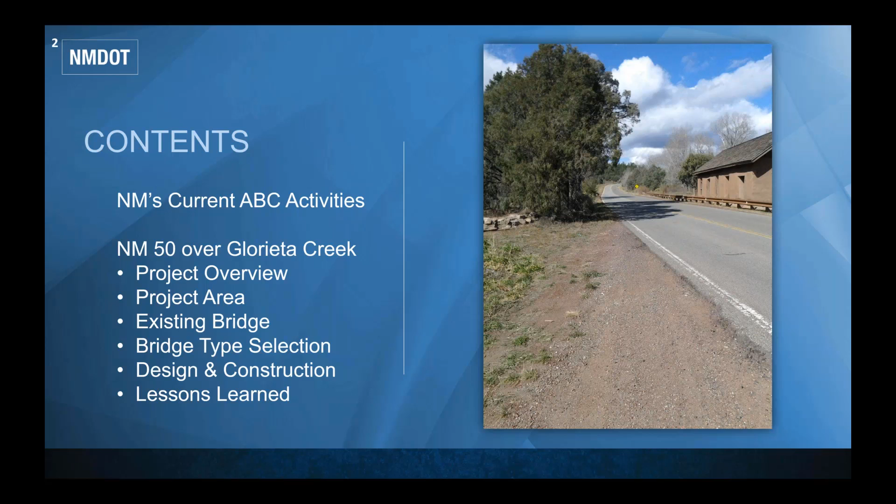In New Mexico, we've been working to advance the utilization of accelerated bridge construction. Currently, the I-25 Romeroville interchange replacement is in design. The interchange is the primary access to a truck stop to the west, and then frontage roads that access several residences in the area. And then to the east is the junction to US 84, which ties into Interstate 40.

It's a lot of commercial truck traffic. It's a very heavily used interchange. A long construction duration to replace the bridge would be very problematic and expensive. So the bridge type evaluation focused on ABC and was completed by our internal bridge staff. The project is now moving forward to phase 2 design.

Also currently moving to construction in the state is a steel bridge, New Mexico 566 over the BNSF Railroad near Gallup, New Mexico. This is a very busy rail line for BNSF. It's the primary route from the ports in California to the east. There's not a lot of time between trains.

So the design and construction approach is to erect the steel girders in pairs with all of the permanent bracing installed. This will provide stability during erection, minimizing the temporary erection bracing, and then also reduce the number of girder sets over the railroad by up to 50%.

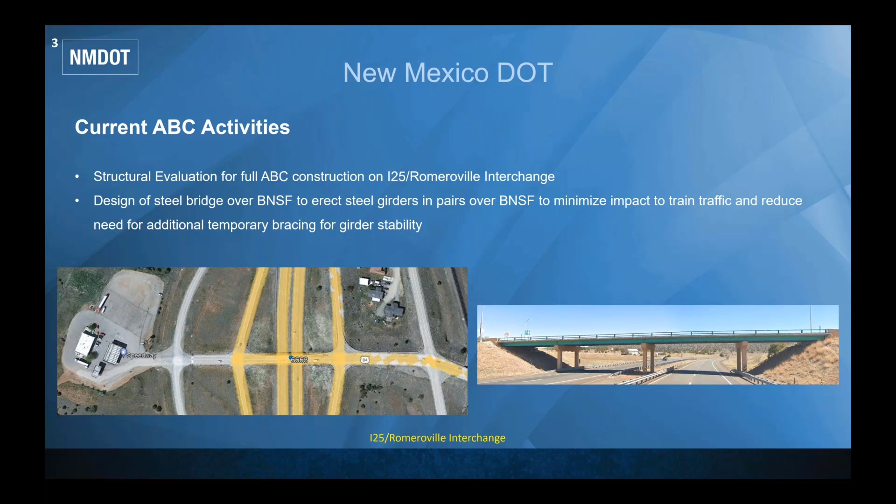In New Mexico, over the years, we have been using prefabricated bridge elements for bridge construction, which is a primary and integral part for ABC. We've completed several projects recently that were originally designed to be constructed as an accelerated process. But when they got to construction, the contractor negotiated and basically changed the approach to be more of a traditional construction process.

The two projects that I'd like to focus on are the Guadalupe Street Bridge deck replacement in Santa Fe, New Mexico, which is shown in the upper right photo. It was a precast deck panel bridge deck replacement on steel girders. Everything went to plan until construction, and then it just extended and became more traditional.

And then the other project was the rehabilitation of the Interstate 40 Endee interchange at the New Mexico-Texas state line. It also used precast deck panels and was our first UHPC joint connection project. And again, once it hit construction, it became more of a traditional approach.

So based on those two projects, we felt that some internal education was needed for the other sections and our construction folks to make ABC more successful in New Mexico. We reached out to FHWA and applied for STIC funding, and last fall we held an ABC workshop in Santa Fe.

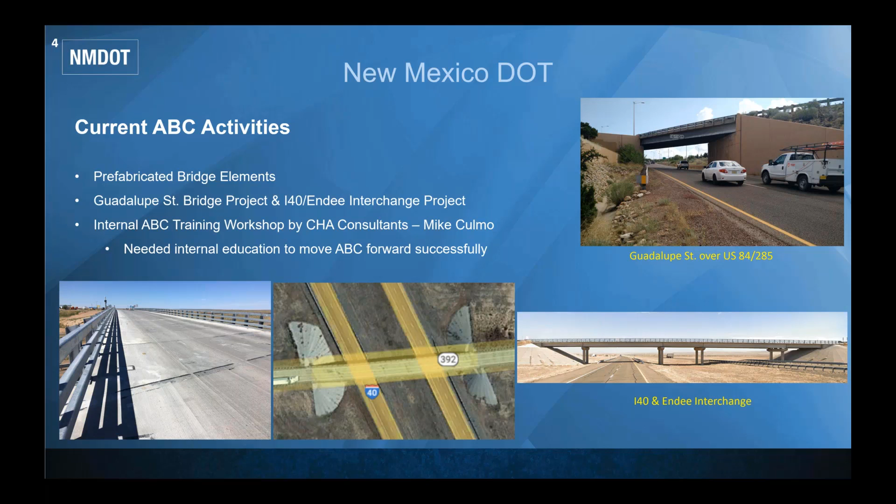So the New Mexico 50 over Glorieta Creek bridge replacement, and that's the bridge shown in the right photo, was our most recent project that required ABC, and it was very successful. Later on in the presentation, Kim Coleman will give a detailed overview of the project, the success of the project, and lessons learned that will be key to NMDOT advancing ABC on future projects.

With the recent federal infrastructure funding that has been given to the states and the ability to use it on local and off-system bridges, we're looking at ways to help the local governments in our state. We currently have a bridge replacement in design that has a good superstructure with good girders, but the substructure is poor.

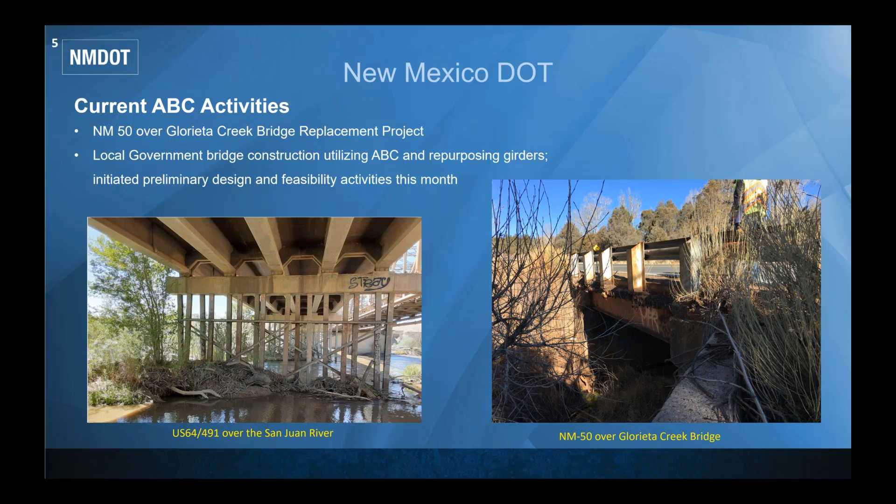We're doing some preliminary design and feasibility analysis to repurpose the girders to help replace poor bridges, primarily in McKinley County, which is to the south of the project site and is located on and near the Navajo Reservation. It's anticipated in our preliminary analysis that an ABC approach will be the most cost-effective method for replacing those structures, since most of them are rural and there's no detour around them.

New Mexico's goal is to advance ABC on our bridge replacement projects. The benefits to reduce construction time, impact to users, and worker safety are very important to us. Current inflation has had a huge impact on our overall construction costs, and traffic control is a large portion of those costs.

Last week, I was at the WASHTO conference as a presenter, but I also sat in on a presentation by Graham Bettis with TxDOT, and he discussed how prefabricated bridge elements are primary components of ABC, and that bridge slides and moves with SPMTs aren't the only ABC methods. And I completely agree with that.

And New Mexico has been using prefabricated elements for a long time. What we need to do is focus more on the construction process, sequencing, and then the contract language to advance ABC. Graham also discussed how they have modified their design procedures for bridges to advance ABC.

In New Mexico, we currently use the Wisconsin DOT flowchart to screen ABC for our projects, but somehow in the end, it usually gets flushed out and ABC isn't the primary method for construction. I would like to modify our design procedures to be similar to what maybe TxDOT has done to advance and make ABC more viable in the screening process, because I think the benefits are good for everyone involved.

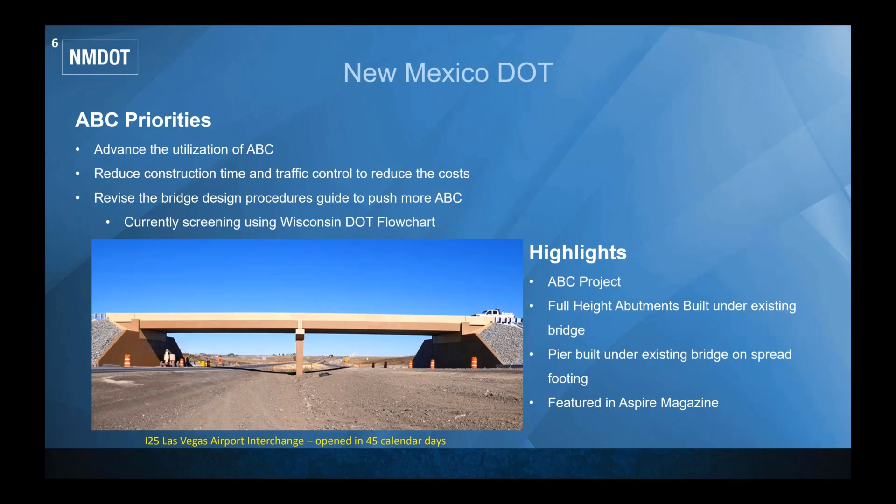Just to highlight on this slide, the bridge in the photo is the I-25 Las Vegas Airport interchange bridge replacement that was done several years ago. It was a 45-day bridge replacement project, and the highlights of that project were it was an ABC project. Full height abutments were built under the existing structure. The pier was constructed under the existing bridge on a spread footing, and then it was also featured in Aspire magazine as a very successful ABC project for our state.

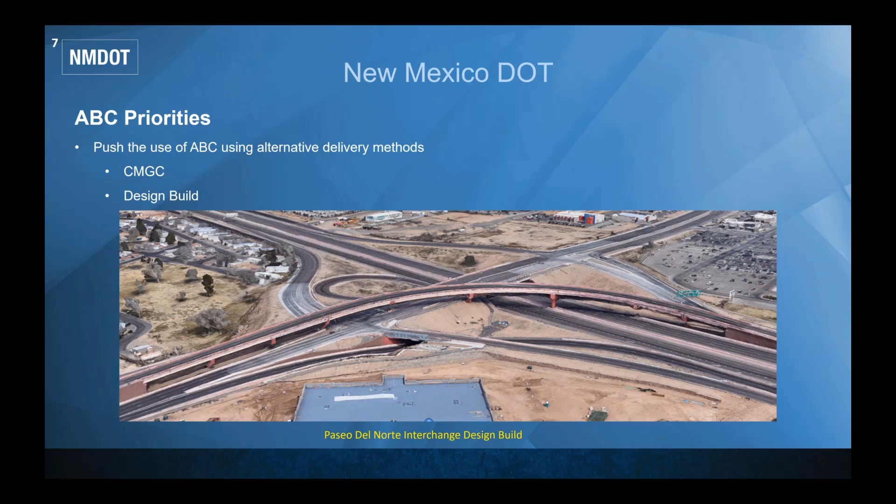Recently passed legislation in New Mexico, I believe, will help advance ABC going forward. Our legislature recently passed CMGC, and we had a cap on design build projects, a minimum cap. I think these alternative delivery methods will help advance future use of ABC in our state on projects. Our most recent design build project was the Paseo del Norte interchange shown in the photo. It is an example of a project in New Mexico that would have benefited from more ABC techniques to complete the construction faster and reduce the user impacts and detours and delays with construction.

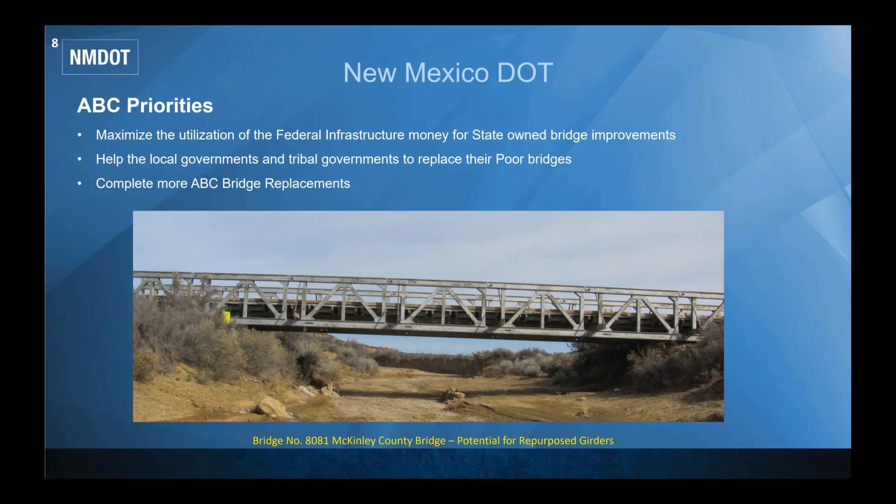Going forward, our priorities will be to maximize the utilization of the federal formula bridge funding to address our off-system state-owned bridges that haven't had the attention they've needed over the years due to lack of funding, and also to help the local and tribal governments rehabilitate and replace their poor bridges. They have also been impacted and limited on what they could do by funding and engineering capabilities. So we want to help address their bridges since it's a significant need for our state. And then finally, as discussed previously, our goal is to advance ABC for future bridge replacements and hopefully resulting in more successful projects like the New Mexico 50 project.

And just to note, as many of you may have seen in the news recently, our state has been experiencing unprecedented wildfires due to drought conditions. Shown is an approximate outline of the current burn scar, and you can see that the project location is very close. President Biden actually just visited New Mexico and toured the area and flew it to assess the damage and has agreed to help fund the wildfire relief efforts here in New Mexico.

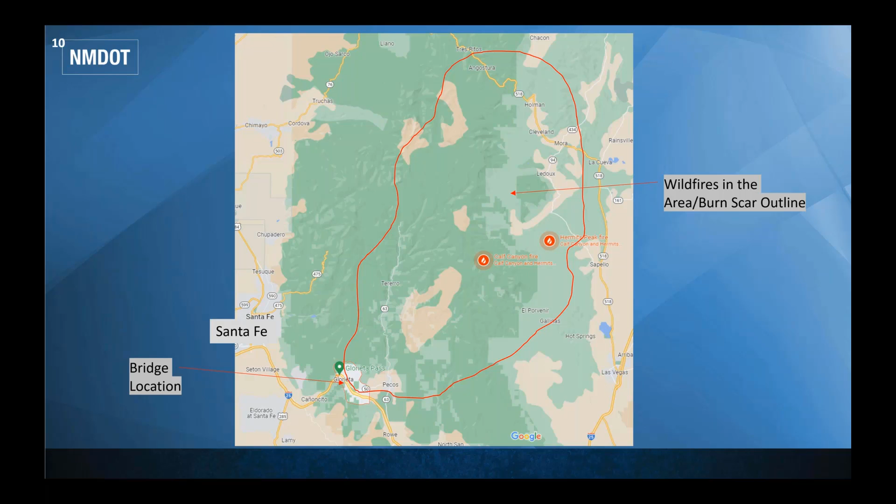Now that I have given a brief overview of ABC in New Mexico, I'm going to pass it off to Kim Coleman, the bridge engineer manager and designer of the New Mexico 50 bridge project, and she will provide a detailed overview. Thanks, Shane, for that excellent introduction to the project area. Now let's drill down a little bit into the details. So the New Mexico 50 Glorieta Creek project was a traditional design bid build project at a total cost of $2.1 million. The contractor was limited to a 7-week road closure, and they made it. The bridge was open to traffic 1 day early, and the project was completed with no claims. So this was a very successful project for us.

NMDOT is the owner of the road and bridge, but I believe our right-of-way is actually an easement through National Park Service land. The project was designed entirely in-house here at NMDOT with bridge, roadway, right-of-way, drainage, geotech, traffic, environmental, and cultural resources all happening in-house. AUI was the sole bidder on this bridge, and they were awarded the project. All the pieces were cast at Castillo Precast, about 25 miles south of Albuquerque in Belen, New Mexico. And UHPC was from Lafarge, and it was their Ductal product.

Our spec did require for this project that the Lafarge representative be on site during the UHPC pours because we wanted to make sure we had their advice as things were going along.

The project had a lot of stakeholders. As I mentioned, the National Park Service owns the land around the project. We also had the New Mexico Department of Game and Fish involved, Santa Fe County, the Santa Fe Regional Emergency Communications Center, including nearby fire departments, and also the Santa Fe Public Schools Transportation Department.

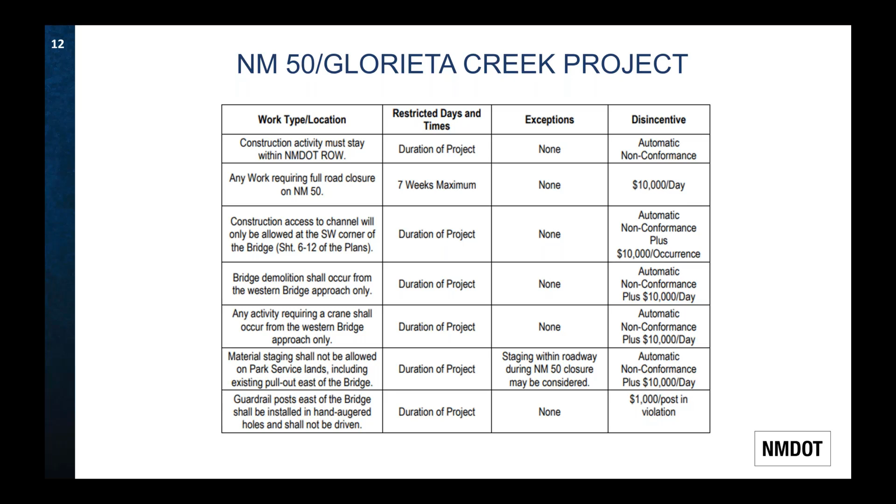Here's a zoomed in map of the area. As you can see here, Santa Fe is just to the south. This is actually northbound, the direction I'm going here, even though the interstate takes a jog. The project site is just over 1 mile east of the I-25 Glorieta interchange on New Mexico 50 at milepost 1.15. Note here we have Pecos to the right on New Mexico 50 and Rowe down I-25.

This project area, as you can see from the purple in the middle of the map, is owned by the National Park Service and is within the Pecos National Historical Park Pigeon's Ranch unit within the Glorieta Pass Battlefield National Historic Landmark. And this was the main battlefield of the Battle of Glorieta Pass during the Civil War. So you can imagine we had some constraints in this construction.

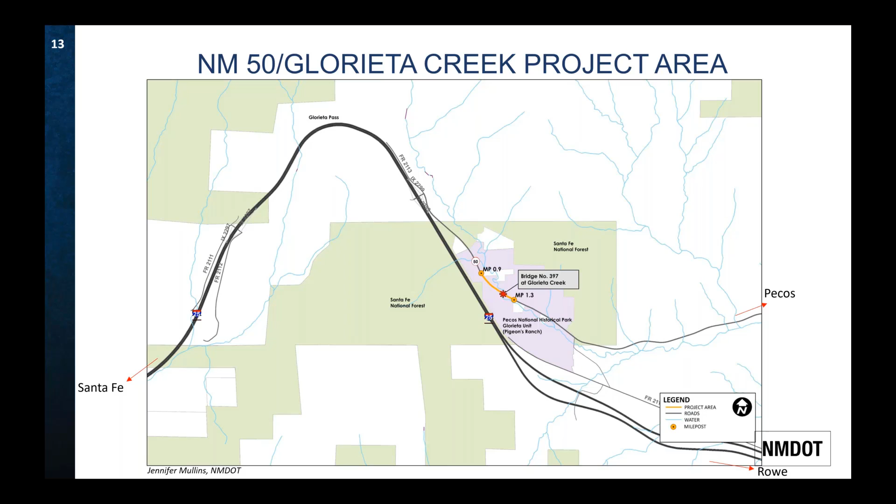Here's a zoomed in map. The detour route for this bridge was 18 miles long. As I mentioned before, we have Pecos here and Rowe here. So if you live just east of the bridge and you want to go to Santa Fe, you have to travel east on Highway 50 to Pecos, south on Highway 63, and then back northbound on I-25 just to get 1 mile towards the interstate.

Quite a few people live on New Mexico 50 just east of the bridge and commute to Santa Fe regularly for work and shopping. School buses use the route for getting kids to school. So we knew if we had to close it to replace the bridge, we would have to get it back open quickly. And we did consider phasing, by the way, and I'll talk some more about that as we go, but it wasn't really a viable option in the narrow right-of-way.

So with the bridge out for 7 weeks, we had two main concerns: school buses and emergency responders. We anticipated that the summer closure might extend into the school year, so we were in communication with the school transit department so they could plan their bus routes accordingly. And we were also concerned that emergency response times would be too long due to the 18-mile detour.

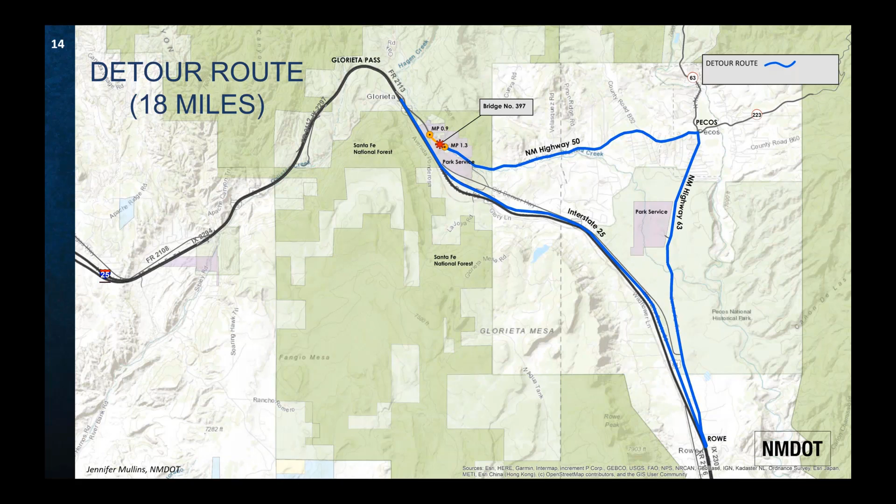So with cooperation and coordination with the National Park Service, we were able to establish an emergency detour route, which is shown here. This is the bridge right here. And as you can see, the emergency route comes off New Mexico 50 on a local road and connects to the old Denver Highway, which actually has an old on-ramp to the interstate.

In the end, it was never used, but it's a great example of pre-construction coordination and included a formal legal agreement between the NMDOT, the National Park Service, Santa Fe County, and the Santa Fe Regional Emergency Communications Center.

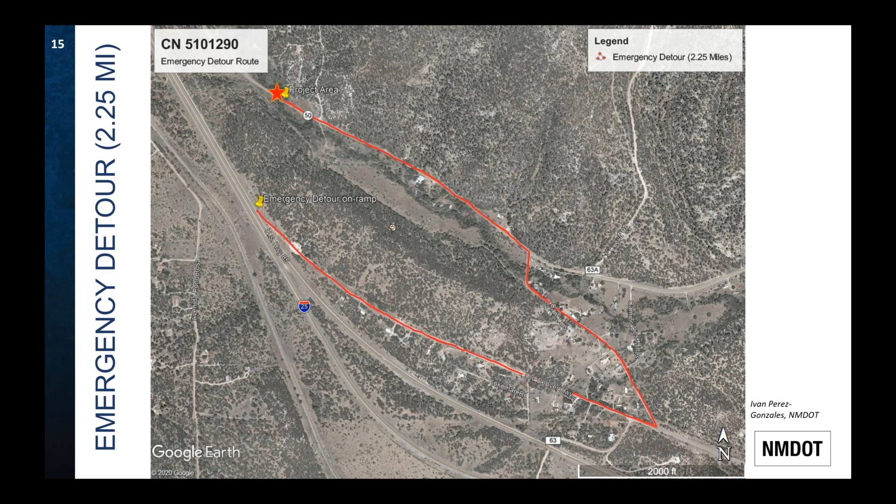In our coordination with the National Park Service, we learned that minimizing ground disturbance was going to be very important in this area. So Bridge 397 itself is not eligible for listing as a historic property on the National Register of Historic Places, but we do have other historic structures in close proximity.

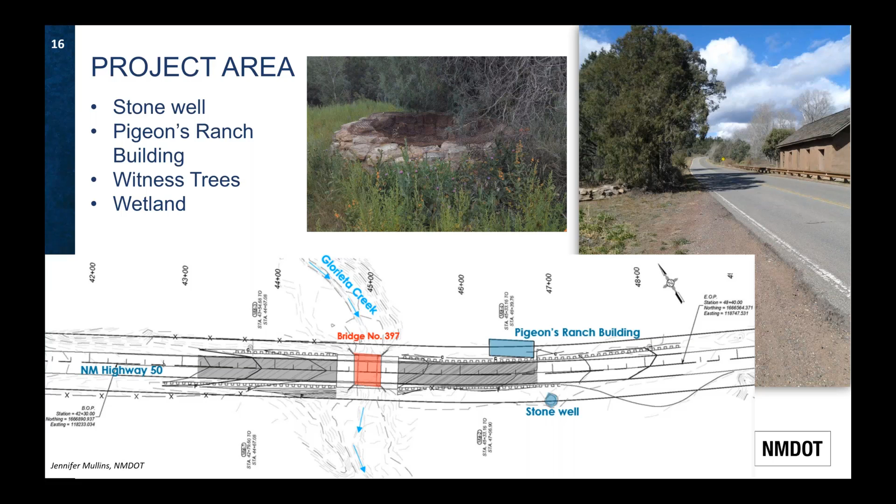Since this was an ABC project, our Environmental Bureau coordinated a preliminary survey of the area prior to starting of construction, and that way, hopefully we could find and mitigate any historic sites before we got started with the road closure. Here's a couple more pictures of the existing site. This is Glorieta Creek looking upstream underneath the bridge, and then here's a picture of the existing bridge from above. You can barely see that it's a bridge, especially since we used W rail back in the original construction as the bridge rail.

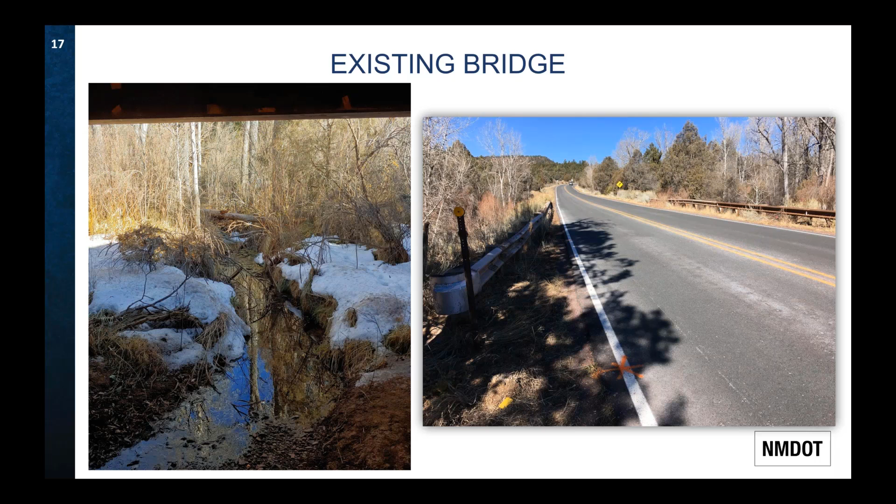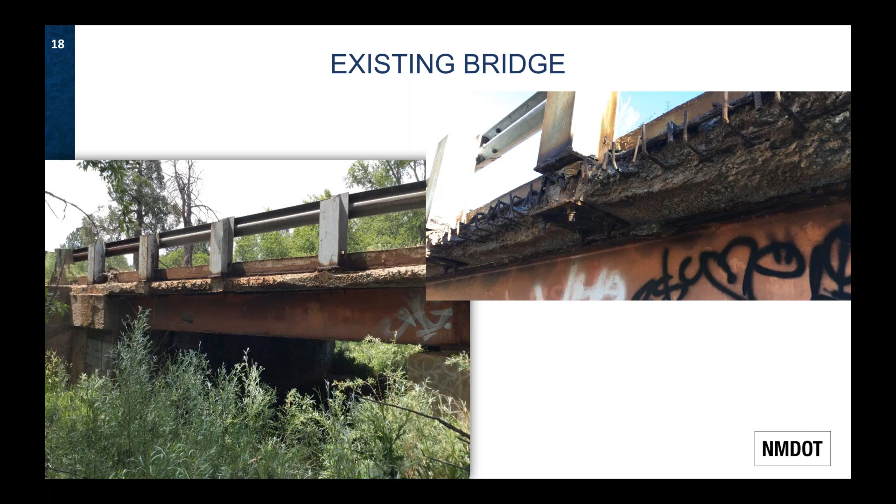So here's another picture of the existing bridge. Note the non-standard railing here, posts and a W rail, and also note the heavy deterioration of the deck edge. Because of the condition of this deck edge and the railing connections to the deck, one of the first steps we took during project planning was to get the crash records, especially any kind of crashes caused by lane departure, because we wanted to make sure as we were planning that we weren't going to have accidents before we had a chance to replace it. And then also here, note the wealth of greenery, which is pretty unusual for New Mexico. So that may be one of the reasons the Park Service wants us to be real careful with it.

Again, a profile of the original bridge in the upper right. This was a 22-foot span cast in place, mild reinforced concrete T-beam bridge built in 1923. And in all of our bridge records, we could only locate one sheet of plans for this bridge. Here at the bottom of the slide, you can see a typical section taken from the standard drawing, which was the only sheet we had, showing the original superstructure typical section. The rest of the standard shows beam sizes and rebar tables for a 23-foot wide superstructure of 6 different possible span lengths. We didn't have any other drawings, including substructure, nothing.

So you're hearing me say that this is a concrete T-beam bridge, and you're looking up here and seeing a steel girder and saying to me, what on earth is going on? Well, somewhere between 1977 and 1979, the superstructure was widened from 23 feet to 33.5 feet. First, they widened the substructure with reinforced concrete abutment walls and wing walls, and the superstructure was widened with one steel girder on each edge, but we do not have any drawings for this. And we believe that the work was done by our in-house maintenance forces.

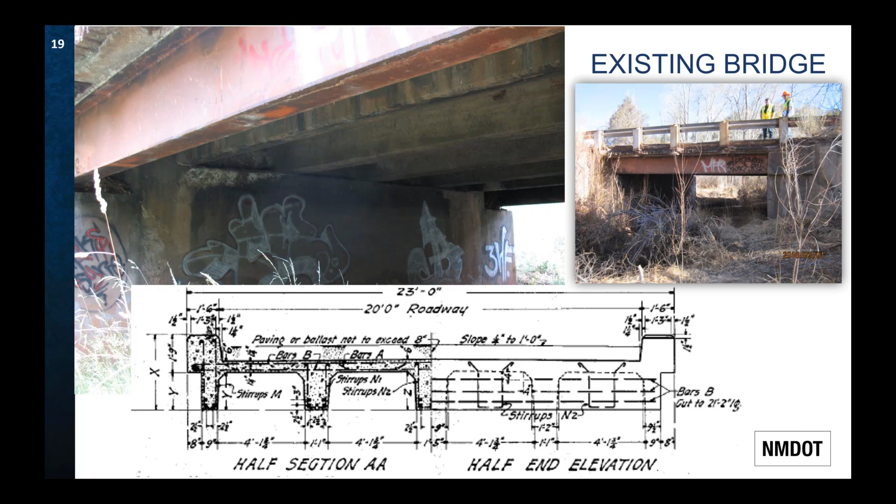So because of the existing superstructure width and the load capacity, I'm going to talk now about why phased construction was probably not the way we could go. We did consider repairing the bridge. And the reason that was attractive to us is first the 18-mile detour, the fact that we had a lot of environmental and historic considerations on site, and also we only had 60 feet in width. We did, however, consider that we had to replace it for the below reasons. 33.5 feet is the total width of the bridge, and the rail is in terrible condition. So we didn't want to be pushing trucks closer to the rail. The load rating was not very good, we had it at 11.3 inventory and 18.8 operating.

And we also chose to do non-destructive testing because we wanted to know for sure what kind of bridge we had out here. We ended up doing GPR, sonic, ultrasonic impact echo, velocity testing, half cell testing, chloride measurements, and carbonation measurements. So we wanted to know everything since we didn't have any plans to speak of. What we found is we actually had a couple of locations on the beams that were 600 PSI. This is supposed to be 2000 PSI concrete, but it wasn't. And then we do have locations in those beams with active corrosion. So in the end, we determined that replacement really was the only option.

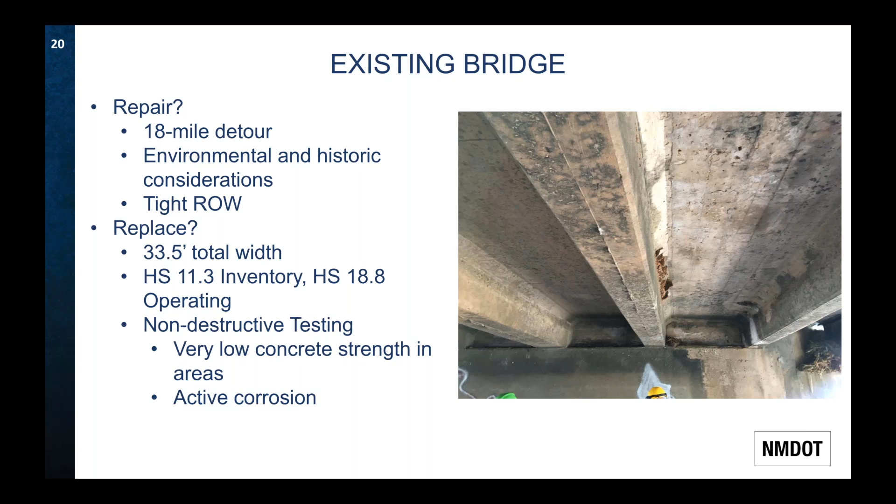To make our ABC assessment, we used the ABC decision making matrix from Wisconsin DOT. This gave us a score of 28, which indicates prefabricated bridge elements and systems. As we've already discussed, the detour is long and it affects the emergency vehicles and school buses, and our right-of-way is very tight, so we couldn't safely phase construction.

We also have significant environmental and cultural restrictions, and there is very limited space for construction staging near the bridge. We did have to use the roadway during closure for staging and materials, not much shoulder off this bridge. So having an accelerated schedule helped to minimize the amount of time material and machinery had to be stored on site. And finally, the National Park Service had many concerns about construction disruptions to the wildlife, the foliage, and the historic look and feel of the site.

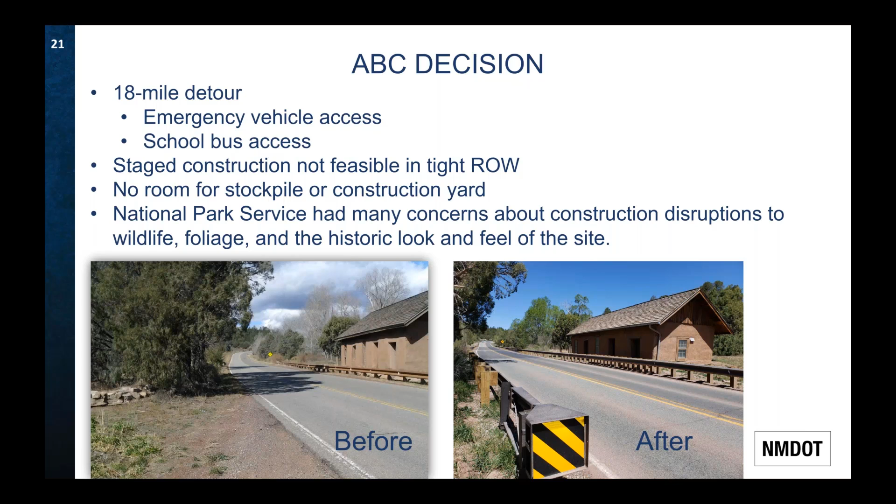Here at the bottom of the slide, you can see a before and after photo. It's hard to see here, but the bridge is right here in the before and right here in the after. I think we did succeed at preserving the historic look and feel of the site. And I do also want to mention the Natina coating. We used a brown coating on the galvanized bridge rail to make it look brown and blend into the weathering steel W rail that Roadway chose to use.

Okay, now for bridge type selection, we compared a precast concrete slab bridge and a prefabricated modular steel bridge. From the National Park Service and the Environmental Bureau, we had to consider several things. First, they wanted us to minimize disturbance in the creek and the surrounding area. So our design and specs worked to minimize excavation, scaffolding, equipment, and demolition and construction debris. And we even kept construction foot traffic within our 60-foot easement. We also needed to minimize vibration, so that drove us to use drilled shafts rather than piles.

The structure needed to have an open bottom, and this came from the New Mexico Department of Game and Fish. They asked that we maintain the ability for all animals, fish, and invertebrates to travel up or downstream uninhibited. So a culvert was out. We couldn't have a closed bottom. And then they also asked that the railing have a rustic, old appearance, and that is why we chose to use that brown Natina coating.

So the new bridge is a 35-foot wide, 40-foot long single span precast concrete slab with open metal railing. The existing concrete abutments were preserved to minimize ground disturbance within the channel and the historic landmark, and to maintain existing flow characteristics of Glorieta Creek. And all of these things work together to minimize disturbance to the critters and the wetland, and also any historic artifacts that might be located on site.

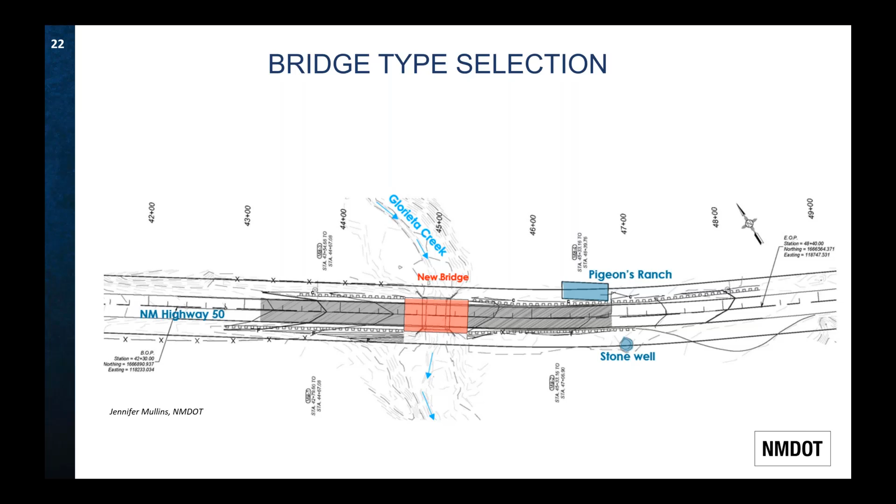So our ABC project elements here, we had a road closure duration limited to 7 weeks. Originally, we were trying to replace the bridge in 2 weeks because the district personnel were so concerned about the emergency vehicle access. But as discussed in our earlier slide, we were able to mitigate this with the temporary emergency detour. So we didn't need to go quite that fast, but we still wanted to minimize the construction duration for the residents just east of the bridges.

A few other things, we originally had 3 shafts per abutment, but to save time, we worked with Geotech to find a configuration where 2 shafts would work. We also used entirely precast caps, wing walls, girders, and approach slabs. All the elements for the bridge were precast except for the drilled shafts. We chose metal rail, and we detailed those rail anchors to be cast into the precast beam, ready for the rail to be bolted on.

Precast concrete rail would have been heavier for the crane to lift, or we would have had to form and cast that concrete on site. And our NMDOT spec does not allow for slip forming, so it was going to have to be the traditional form and cast concrete rail. So we chose metal instead.

We also had the contractor do a UHPC mock-up pour in the precast yard just to get them familiar with how the UHPC pours and works and sets and leaks out if you don't have a watertight seal. So that was a time saver during construction. We used just-in-time delivery. As I mentioned, the I-25 Glorieta interchange is about 1.2 miles away from this site.

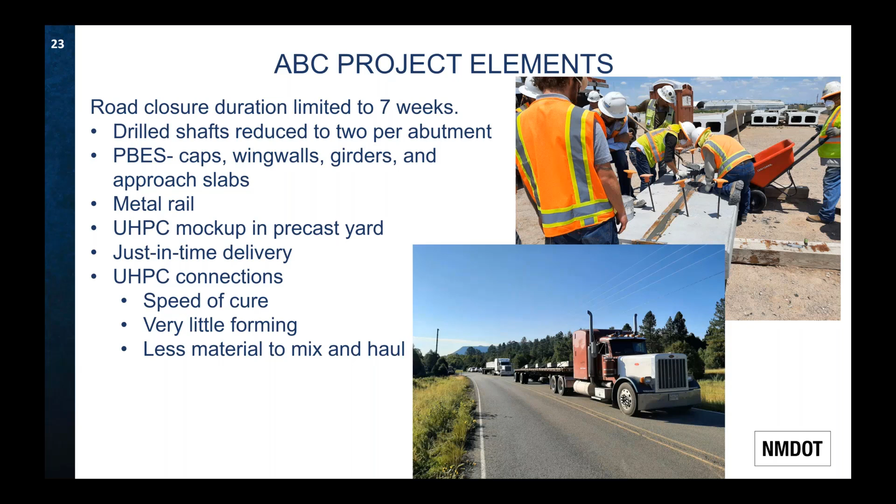And again, at the end, we chose UHPC connections for speed of cure so that the contractor could proceed with their critical path tasks sooner. Not much forming was involved because the precast pieces ended up being a large part of the UHPC formwork. And also there's less material to mix and haul because the joints could be narrower. And also we could avoid waiting for concrete trucks.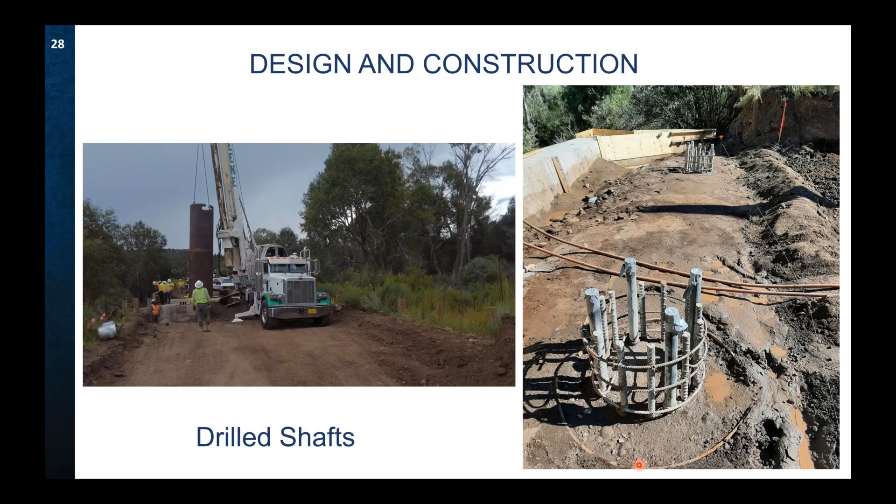In our design, this is the existing abutment. We did investigations to understand what we had since we didn't have any plans. We did some non-destructive testing and bore holes to understand how thick the concrete was in the original abutments. And we also did some low strain integrity testing to try to understand the depth of the abutment wall. It turns out that this abutment wall is embedded 3 feet into bedrock.

Because of that, and because it was not so thick that it conflicted with our new substructure, we determined that it was beneficial to leave it there. It would protect the new substructure from scour, and it would preserve the existing look and feel of the site. Also, it would preserve the flow characteristics of the creek. However, it was a bit too tall, so we have this drawing here that shows how they could saw cut the top of the abutment off.

We did have this reinforced concrete area on either side from the widening. And we learned that it was reinforced during the non-destructive testing. So what we did was we pulled that down a little bit further, spliced some new pieces of rebar on, and also put in some anodes to extend the life of that reinforcing.

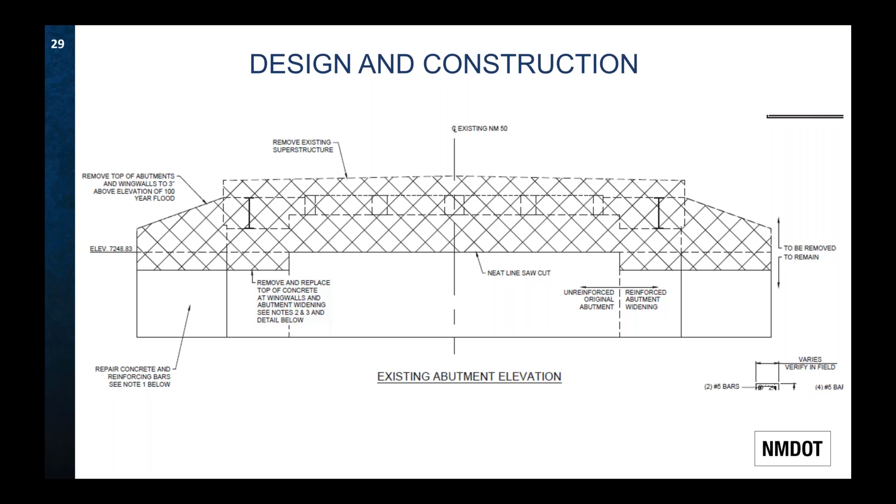The contractor came up with a really great way to quickly remove the top of the unreinforced abutment and get a clean, smooth, and finished surface. You can see a kind of guide rail here that they mounted a circular saw on and just sawed the top off. There was some chipping around the existing rebar up here, but otherwise it was a really great surface that they finished with.

Unfortunately, I did not get any more pictures of the demolition, but I do want to mention the contractor ended up pulling this bridge out by saw cutting the superstructure apart, attaching lifting devices to each piece, and lifting it away from the channel onto a truck to be hauled off. So there was very little debris and no need to get heavy equipment down into the creek for cleanup.

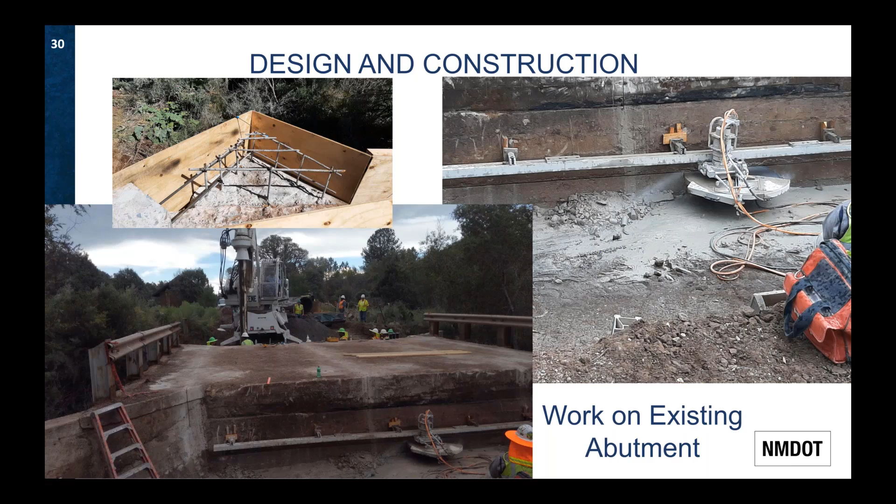Now let's start putting the new bridge together. On the upper left, you have a photo of the cap here being backed down New Mexico 50 to get to the bridge site. And from this view, you can see the roughened surface keyway and bars for the wing wall connection. And I also want to point out this little ledge up here. This is where the approach slabs will sit.

In the upper right, you can see a photo of the cap being lifted into place in the tight right-of-way. This is the south side of the road, and this is the north side of the road. And the contractor was not allowed to trim or damage those trees. So they had to pick this cap up off the truck and keep it aligned to the roadway center line as they swung the crane to get the cap towards its final location.

Here in the lower middle, you can see the cap almost ready to set down in place. And this is the guy who was making sure that it got set down right on top of the shaft bars properly. Note that the shaft casing, remember, needed this seal right at the top here, because this is going to be the watertight seal that holds the UHPC in the connection.

This turned out to be a problematic detail, and I'm going to talk about this in the section on lessons learned, because it also has to do with how we handled the drilled shafts. But for now, I do want to ask you to keep this detail in mind, and note that there's not much room for error in getting those caps set down in the right place.

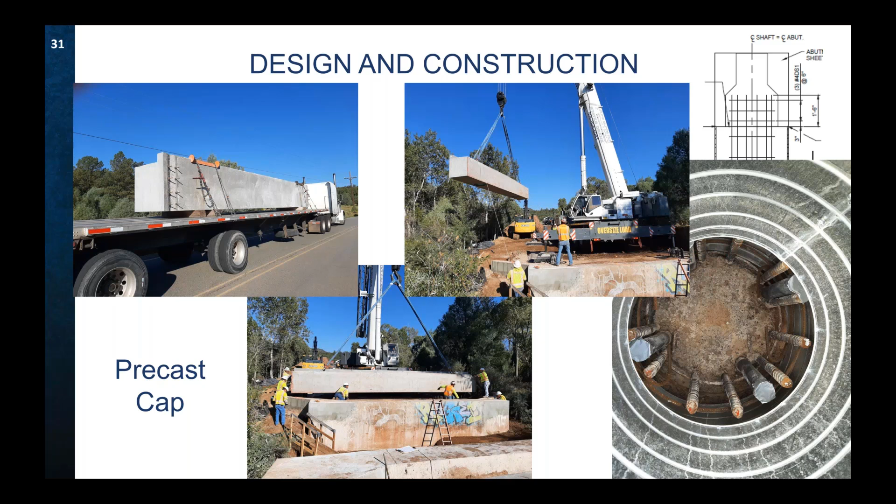Here in the lower right, we have a view looking straight down into this cap annulus, and just above the photo here, we've got a picture. You're looking straight down here, and you can see the shaft bars, and you can also see how tight it fits into that annulus. And we'll talk about that, as I said, in lessons learned.

Here's our wing wall. The upper left shows a clip from the design plans. And again, here's that ledge that the approach slab sits on. In the upper right, we've got a photo of one of the wing walls being lifted into place. And then here on the lower left, it's set and ready to be connected with the UHPC right in here. Here's the detail of that joint from above, and then looking down in, you can see it's formed up and ready to receive the UHPC.

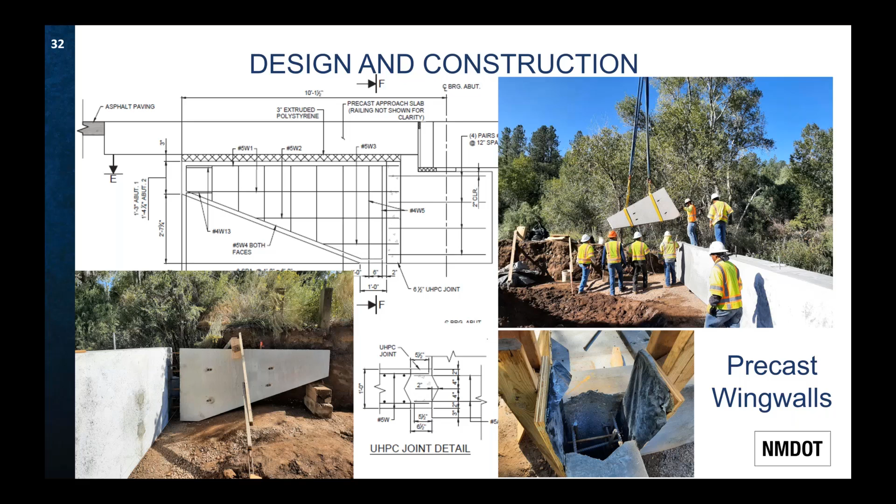Here are our precast slabs. On the left, again, a clip from the design plans. Up here, you can see where we placed the anchorage for our bridge rail, and then also the shoe plate on the ends of each girder. Here on the low side, you can see a typical interior girder, but I do want to point out the center slab actually had the crown cast in.

So we were trying to limit the amount of time they were going to have to grind the normal crown into the bridge. So the precast slabs were set on the crown. The center one had the center of the crown formed into it. So all they had to do was just grind the UHPC joints smooth as a time-saving measure. Here on the upper right, you can see our joint detail between the UHPC slabs, and this photo is of one of the first slabs being set onto the new abutments.

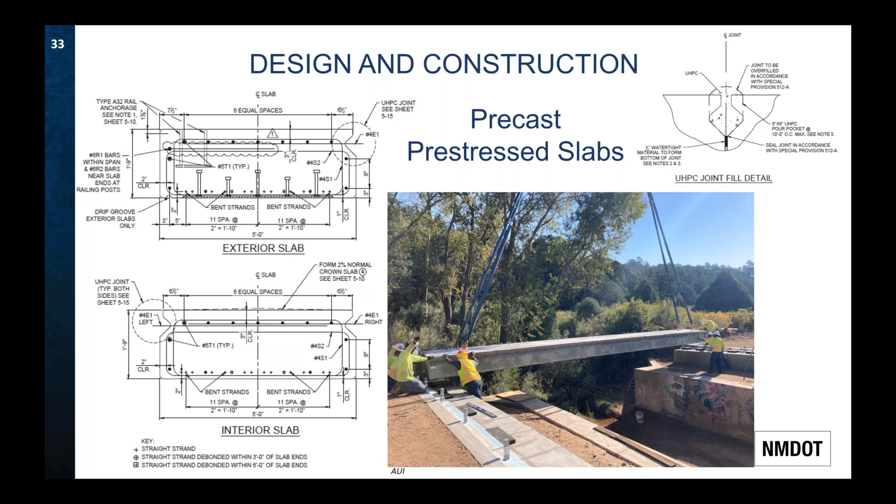Our approach slabs ended up being pretty complicated. We wanted a buried approach slab for paving and a smooth transition, but we also had a lot of other stuff going on. We had the UHPC connections, we had the normal crown on the roadway, and we needed this level area for the metal rail posts to connect. We also had to limit the size of the pieces so the crane could lift and set it from across the creek.

Oh, I do want to point out here, we also have this turn down to minimize escaping fill from behind the wing walls. So these ended up being complicated enough that my team had some difficulty making sure that we had clear and enough detailing. Because of that, the precaster had some difficulty getting these constructed correctly. So you want to be careful with the pieces and make sure you don't make them so complicated they can't be built.

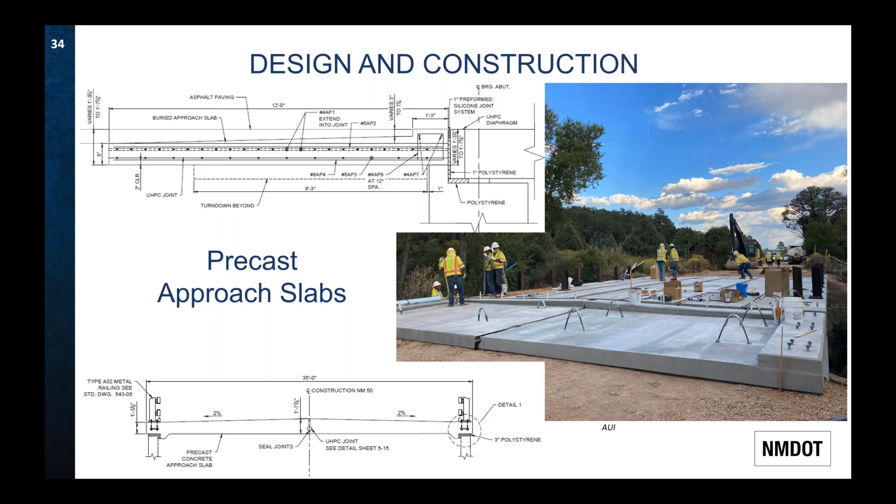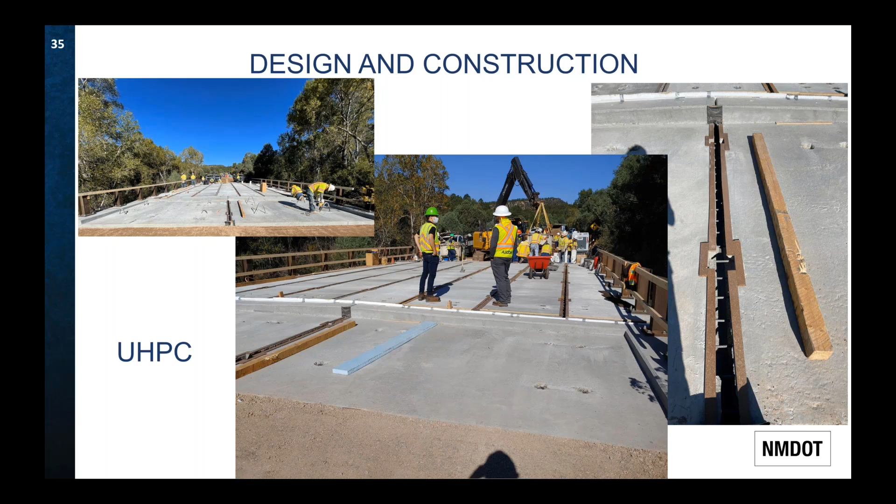Okay, here's on the upper left a photo of all the pieces in place, and we're getting ready for the UHPC pour here in these other two photos. And shout out to one of our EITs in the NMDOT Bridge Bureau, right there in the middle. I don't know if he knows I caught him in that photo.

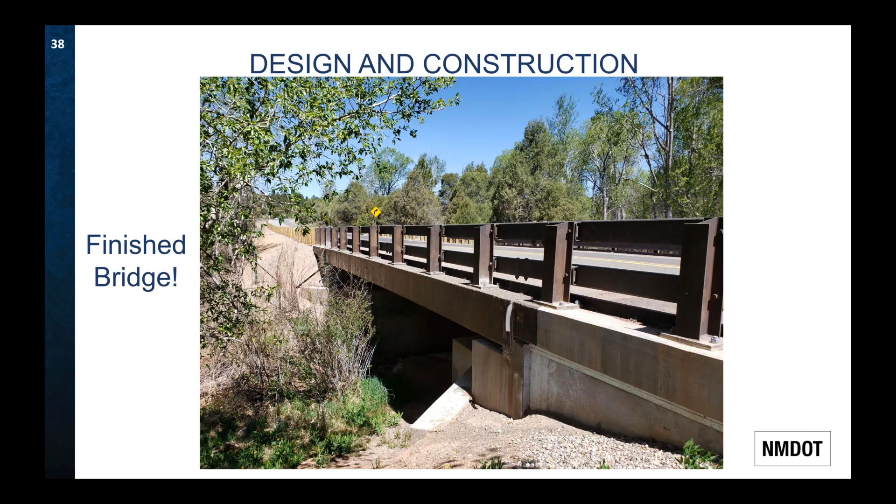So let's talk about some lessons learned for our future ABC projects. I think we should provide a suggested submittal timeline. This is typically a means and methods thing, but in New Mexico, our contractors have not been asked to do a lot of ABC, so I think a little bit of guidance on that might be welcome to them.

On this project, even though we requested that submittal early, it came with very little time to spare before the precast production should have started. And of course, it required revisions. So we had to make sure we got all of that figured out before we started the 7-week closure.

I think in future also, we should identify a backup submittal reviewer ahead of time, someone who's familiar enough with the design plans and the schedule to the extent that they could provide a review. It happened during our project that our 3-person design team received the 47-page precast submittal after one of us had been reassigned to another group and one of us had a death in the family. So all of our team's work was being handled by a single person. And that gets pretty hectic, and you've got to make sure you get these submittals turned around. So a backup reviewer would have been a good idea ahead of time.

Also, we had pandemic delays. Nobody, I think, could have anticipated how heavily that would affect a project. But we did have key construction activities occurring when some of our staff had to isolate. So we ended up having to get some consultant help to fill in and be on site and monitoring things so that our other employees could isolate due to COVID.

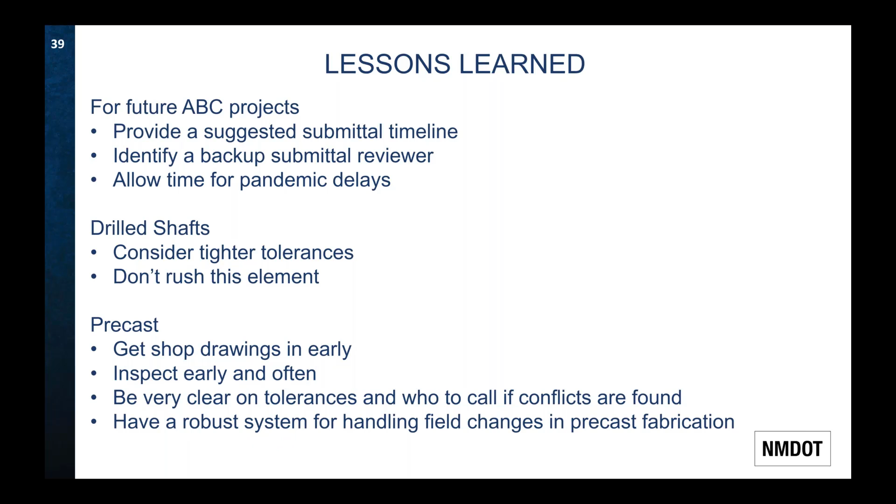Okay, our UHPC connections. We need to be careful of hydrostatic pressure. Again, from our discussion of the abutment cap, we needed to have a watertight seal between the top of the drill shaft casing and the bottom of the cap. The contractor chose to use a product called Ram-Nek around the top of that shaft casing to make their seal for the UHPC. Unfortunately, when they were setting abutment 1 cap down, it didn't go down in quite the right place to begin with.

Let's go on here. Another one that came in beforehand was, how successful was the contractor in achieving the design strength for the ultra high performance concrete in the joints between the precast units? We had absolutely no issues with concrete strength. Okay.

Then were there any issues encountered during construction that altered the schedule? And if so, how were they handled? Yes, our precaster unfortunately abruptly lost a large number of employees after fabrication began, so they had a little bit of a hard time meeting their schedule. We had a lot of rain in the area, which was saturating the backfill, so AUI had to do some aggressive work to dry out that soil before they could put the backfill in.

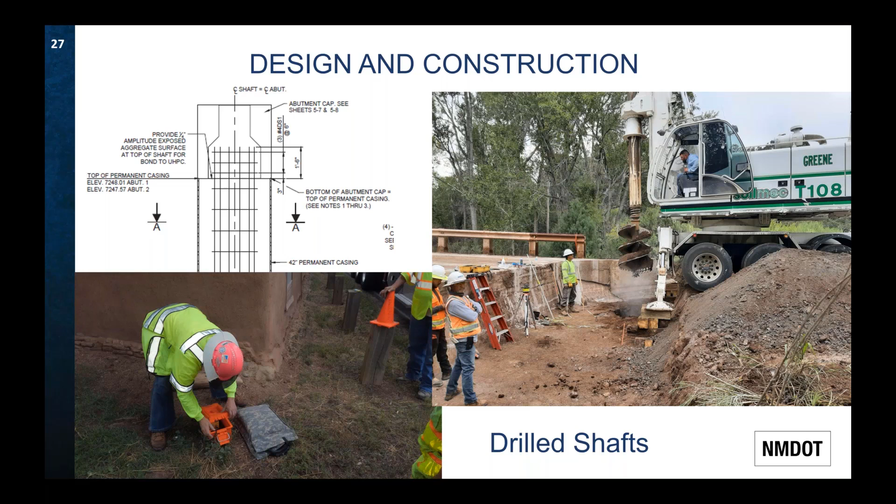There's another question that came in beforehand. What issues, if any, did you run into with the precasting of several components of the bridge and having to move them on site? Yeah, we didn't have any troubles with moving them, I don't think. That was a very smooth process, but we did have some pieces with flaws, and most of them occurred on the approach slabs, the really complicated pieces. One of the header curbs had a strange sag in it, and let me try to find that slide for you. You can kind of see what we had to do.

And just to add to that, Kim's group did a really good job up front looking at all the challenges associated with getting the precast elements delivered. She worked with the bridge management section to make sure she wasn't exceeding weights, and one of the things that, if I recall, pushed out using a straddle bent was just the size and length of the straddle bent to access and get delivered on site.

Okay. How far did they have to haul the members from the precast yard? So, let me see, the precast yard is 25 miles south of Albuquerque, so I would say about 120 miles. Okay. And just in time delivery. Just in time.

Good. Another question that came in beforehand: what was the biggest engineering challenge the contractor had to overcome that wasn't designed by the engineer of record? I think really the only design work they needed to do was on the demolition plan and how to get that old bridge out of there safely. They did also have some learning to work with the UHPC. Okay.

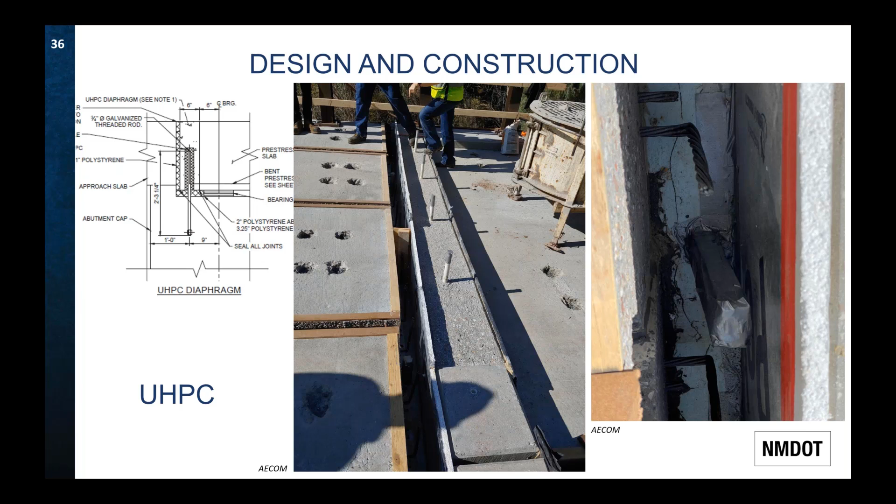Okay, thank you. Next question is, why was the UHPC joint kept so narrow? It obviously was a challenge for the pouring of the UHPC. Cost. We were trying to minimize the amount of UHPC we had to use, but we did provide some, I think I can show this. As you can see here, let me get the pointer up. You can see we did provide these pour pockets. So every 10 feet, we had a pour pocket to help them have enough room to pour that in.

Okay, thank you. Next question, with the use of UHPC, what was the rebar consideration? 60 KSI, 80 or 100? Corrosion resistance a consideration also? Yes, in our slabs, because this is an aggressive environment, because we have salts and de-icing chemicals on this route, and also because the precast slabs are the driving surface, we used 100 KSI ChromX in the main superstructure. In the rest of the bridge, we used 60 KSI black bar. We also added some sacrificial thickenings to the top of the slabs to provide for grinding, but also just to add additional protection to the reinforcing steel over time.

Okay, thank you. Next question, I'm interested in early strength of the UHPC within hours or days, since this is ABC. Do you have any information? Off the top of my head, I don't. I would have to go and ask our construction folks what the cylinder breaks were for the very early stages, like 2 days, 4 days. Okay.